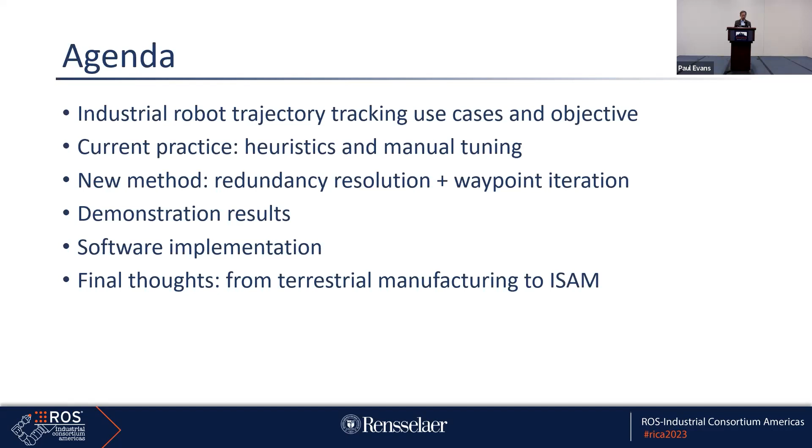Okay, so the quick agenda. GE brought this case, this use case to us - I'll be talking about their use case in a minute. When we initially looked at it, we said, oh, this has got to be a solved problem, right? We talked to other people and they said, oh, this has got to be a solved problem, you just use RoboDK, right? You use Robot Master, use Octopus, done, right? If you can do this in CNC with a bunch of G-code, you're done, right? So we went back to look at the problem a little closer, peel back and say wait a minute, there's still a lot of heuristics and a lot of manual tuning that's done right now. And there's no idea how optimal or near optimal it is, whether there's room for improvement or not. And also it takes a lot of engineering time to tweak it to work. So we developed a new method thanks to ARM support, and we have demonstration results. We do software implementation, and this is in partnership with GE, with SwRI. We use Tesseract for a number of different things, and Wason Technology. Then I'll talk about some path beyond this project.

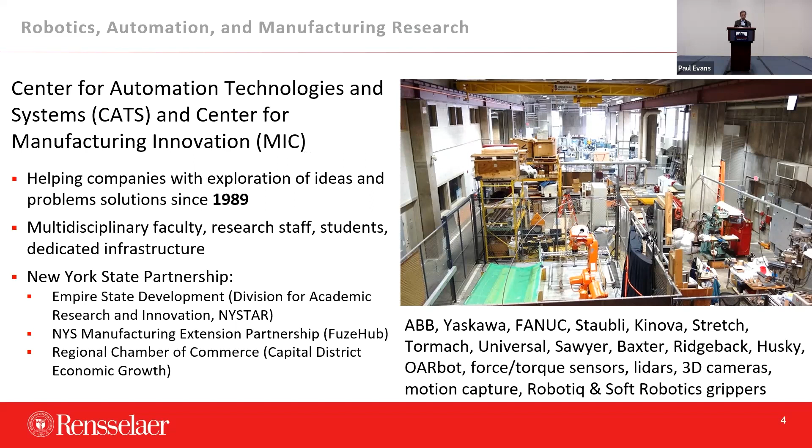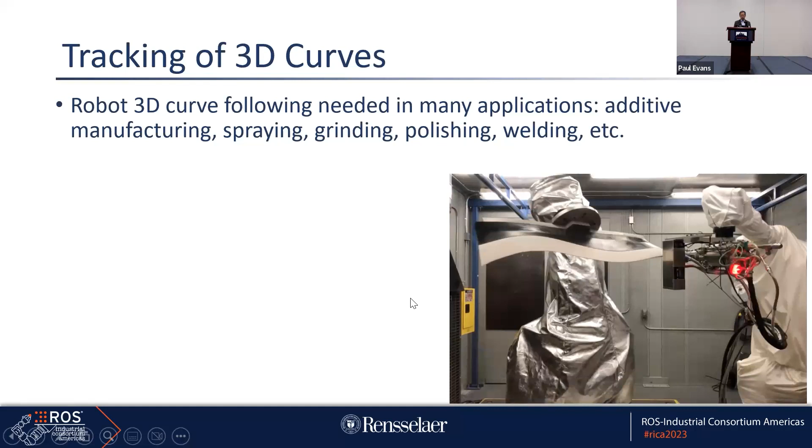So now the motivation for this project is cold spray. This is a turbine blade, and this is a cold spray coating, which is the high-speed impingement of particles on the blade on the leading edge to give it additional strength and corrosion resistance. This is from YouTube, and you see it's not just one robot, but two Fanuc robots working together, using something called coordinate motion, which you have to purchase extra from Fanuc. You say, oh God, this is really weird motion - how the heck do you teach the waypoints for the robots? So they did it, first for a single robot, and then when they pushed for two robots, things got a little dicey. Why is that? Because the task itself is 5 degrees of freedom.

You have 3 degrees of freedom for position and 2 degrees of freedom for orientation, because you can roll, right? So you have 1 degree of redundancy for a 6-DOF robot. Now for 12, so two robots, 12 DOFs, you have 7 degrees of redundancy. How do you resolve that 7 degrees of redundancy, right?

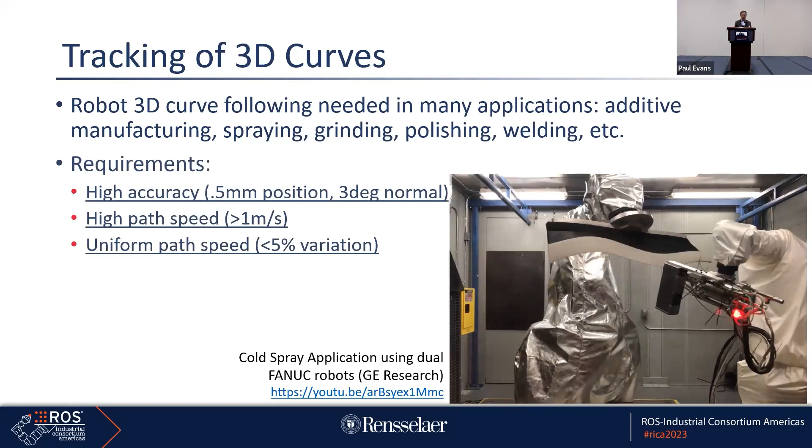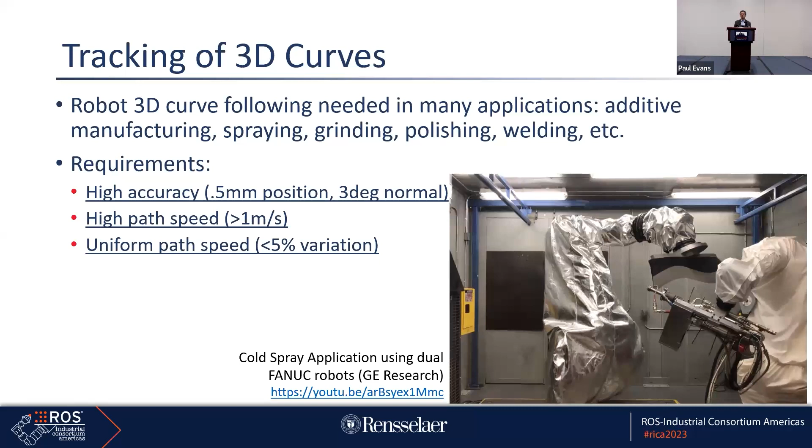It's done by hand. Furthermore, the requirement, this is maybe just GE, right? So it's not universal, lots of applications don't require this. They need high accuracy, because for the cold spray to really produce the impact you need, you have to be very close. So they say plus minus 0.5 millimeter, 3 degree normal. And they want very high speed. When they came to us, they said our reach goal is 5 meters per second.

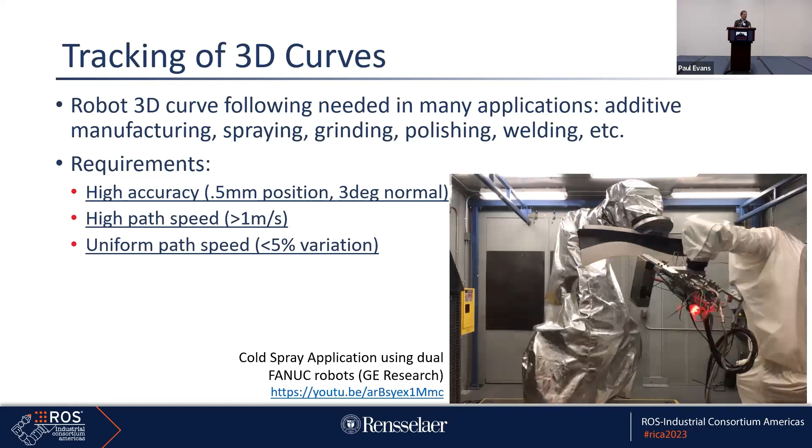I said, well, why don't we dial it back a little bit? So let's make it greater than 1. Okay, even that is not easy, right? And furthermore, they want this to be uniform speed, to have as uniform coating as possible. So what is done right now? How do they do it right now?

So first of all, let's consider a single arm with a fixed part. So in our lab, we have ABB robot 6640, and another robot just fixed, holding a part. So these are two test fixtures we have.

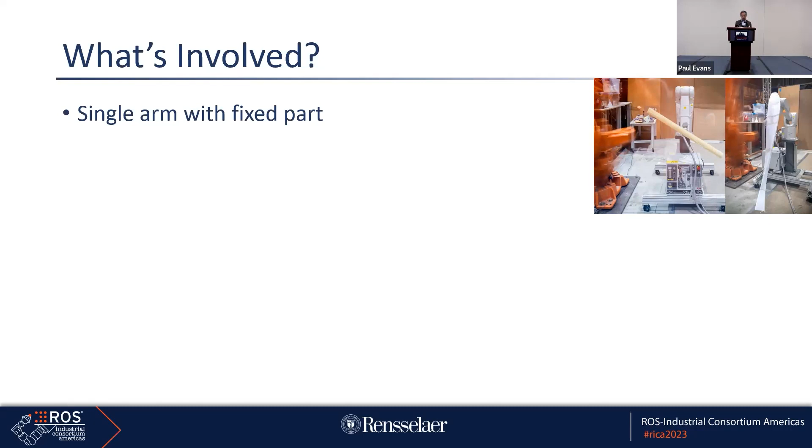So the first part is you need to determine where to put the part with respect to the robot, right? That's position and orientation, and you can put it on a stand, so that's a number of degrees of freedom. Then determine the tool orientation, because you have 5 degrees of freedom, so you need to determine this additional degree of freedom. And then you have to choose the arm pose.

This is a kind of subtle point, because earlier Dave Coleman talked about inverse kinematics. For a particular robot, you have 8 different poses, 8 different solutions for the same Cartesian pose, right? So which one do you choose? Most inverse kinematics solvers, for many robots, only give you one, because they use a Jacobian-type least squares approach instead of finding the closed form. And some robots don't even have a closed form solution.

If anybody looks at the Yumi, the ABB Yumi 7 degree of freedom arm, fix one of the joints, you have 16 solutions, but even though there's no closed form, you can still compute all solutions efficiently. I'll mention that a little bit. So all of this we lump into a bucket called redundancy resolution. That means you have multiple choices, right? So you have to resolve that redundancy.

Okay, the next step is to choose the waypoints. For the robot program, you use waypoints and then blend them together. So you also need to choose the motion segments, the motion primitive. Do you use linear motion, move L, Cartesian linear motion, or move C, Cartesian circular motion, or move J, joint motion, straight line joint motion? Of course, you have the corresponding interpolation of the position and orientation.

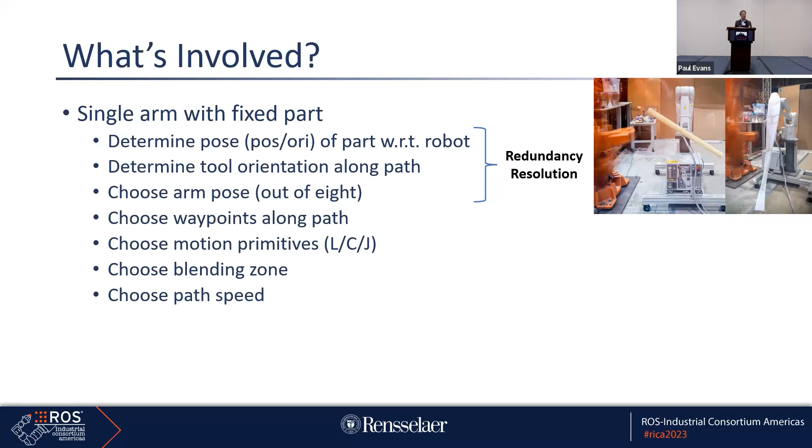And then to choose the path speed, you get to choose that too. All of this is motion programming, so basically you need to do both, okay? So you can see that usually what's done is you choose a uniform set of move L segments, linear segments, just like a CNC. The thinking is still very much CNC-driven, not realizing the constraints of articulating a robot, okay?

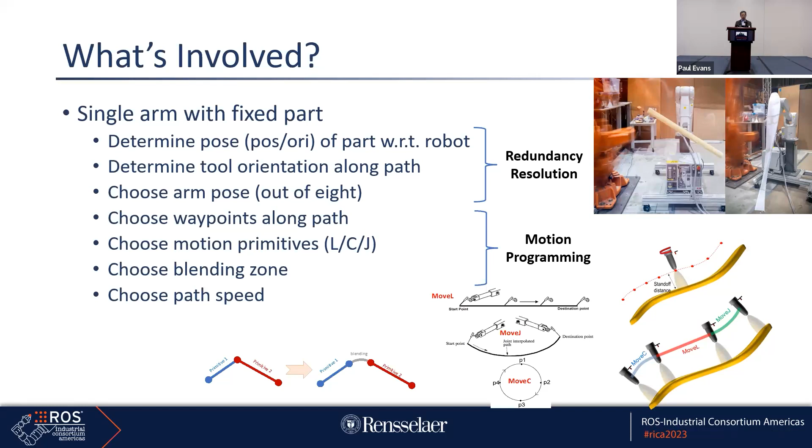And then you have a mixture of L, C, and J, and you have the blending zone. So how's it done today? You put the part in the middle. There's an intuition that arms should not be near singularity. So when it's outstretched, it's near singularity, it's no good. So somewhere in the middle, not systematic, but somewhere in the middle. And the tool orientation is chosen just to stay away from singularities. Then uniform space, straight line, that's how RoboDK does it, RobotMaster, Octapuz. You can tweak those, but the tweaking is pretty much based on singularity avoidance.

And then typically try to maximize the blending zone. The problem with the maximum blending zone is that you have tracking error. You have more smooth motion, but you have tracking error. And then you keep on lowering the speed until your spec is achieved. So usually that means you compromise on your performance if the speed, your cycle time, is your performance.

Now, for the dual arm case, it's even tougher. So how do they do it? Heuristically assign a percentage of motion. So you say, okay, I have a big arm, 60% goes to the big arm, 40% to the little arm. And then you use a single arm approach, right?

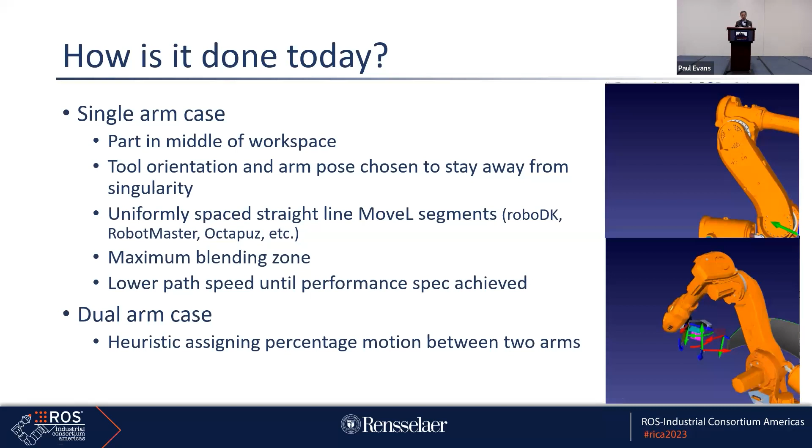All right, so you say, this can't be right? There's gotta be room for improvement. And yet when we talk to people, everybody says, oh, solved problem. Okay, so this is a Mac versus PC issue. So now you can see, okay, I use a Mac, so this, but you can see this is how the baseline is done today. So we use the following approach.

Basically, we decompose the problem. If you look at this as a gigantic optimization problem, forget it. It's not solvable. Obviously NP complete, just take forever. It's not practical. So we decompose the problem in the following way.

First of all, we do pose optimization and redundancy resolution to just tackle the redundancy resolution. Once you do the redundancy resolution, then instead of using uniform points, we use a greedy search. Basically, we want to use the least number of points to meet the kinematic fit.

Okay, so we use J, C, and L. And then minimize number of waypoints. Why? Because the waypoints have blending. Blending screws you up, right? Compromise performance. And then we adjust the blending zone for uniform speed.

Finally, the most important thing is what you specify, which we just talked about a little earlier, is that what you specify is not what you get, right? So you say, I want to follow this path, I specify all of these waypoints with this blending zone. You don't know what the hell you're going to be getting, right? You may get close and you may get a blip.

Every robot company does things differently, right? We use ABB, Motoman, and Fanuc, and even Universal, Sawyer - they all do things differently, and they don't tell you exactly how that's done. You can't even predict unless you run it, right?

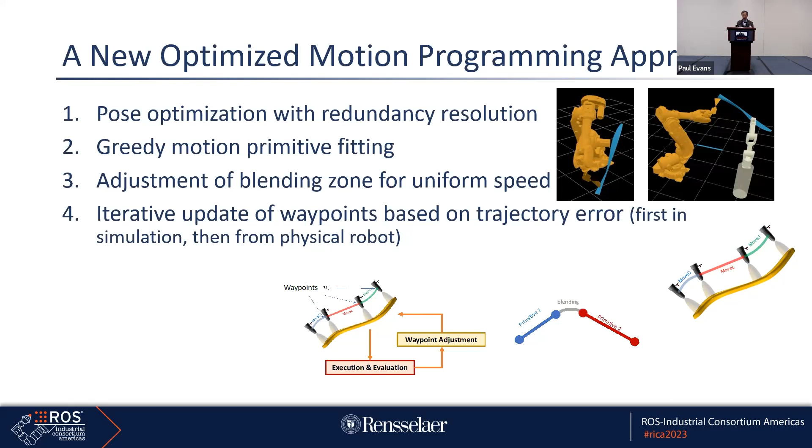So what we do is use an iterative algorithm. First of all, we iterate in simulation. Now, and then port to physical robot, of course, you will operate differently. And then we train some more using the physical data, okay, iterate some more. Okay, so I'll talk about each one very quickly.

So pose optimization, the redundancy resolution. So first of all, we use the standard. Earlier I was talking to somebody about Tony Maciejewski - it's a redundancy resolution, standard stuff. Okay, local redundancy resolution using quadratic programming.

But the challenge here is what is the acceleration constraint? This is where robots are different than CNC, because the robots have articulated joints, so the constraints are pose-dependent. The Cartesian constraint is dependent, how that relates to joint constraint, and the joint acceleration constraint depends on the Jacobian.

But we don't know what the acceleration constraint is. You look at the robot spec, you can of course see the joint velocity constraint, but nobody will tell you the joint acceleration constraint, because that's fundamentally the torque constraint, and then it depends on the inertia, depends on the load. You don't know what it is, right? You can't calculate it. So what you do is you have to shake the robot around, okay?

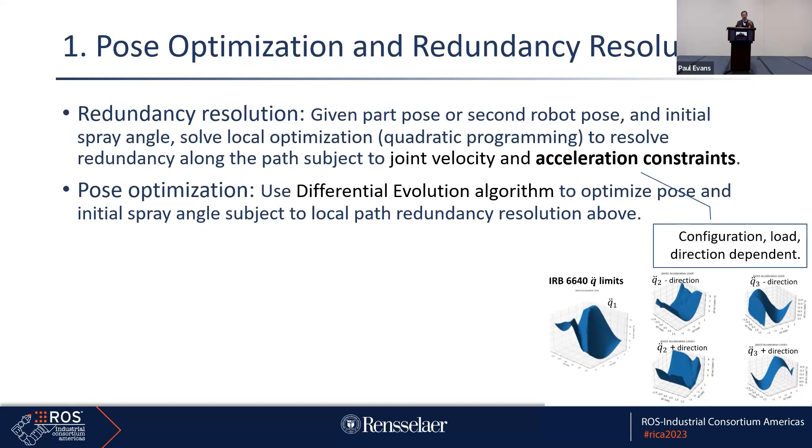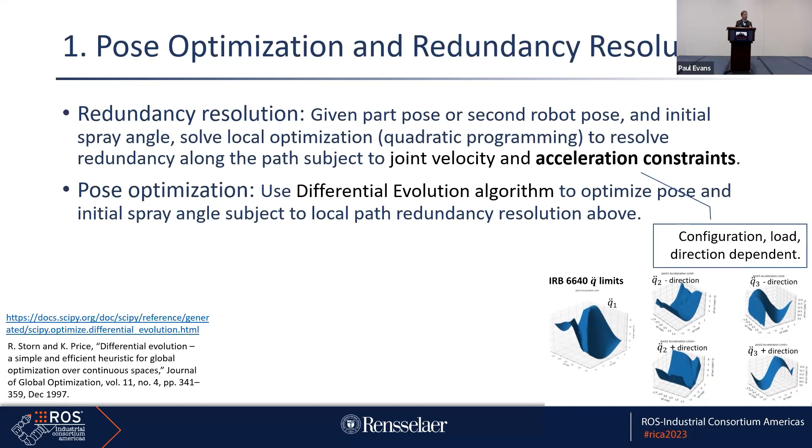So this is experimentally obtained, and then for a given pose, we optimize the pose based on that redundancy resolution algorithm. And we use differential evolution - I think somebody mentioned differential evolution earlier. And we use a standard open source differential evolution algorithm, and it seems to work reasonably well.

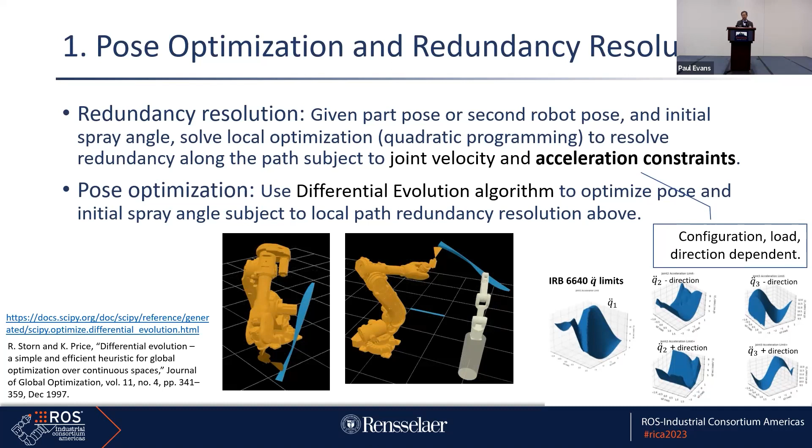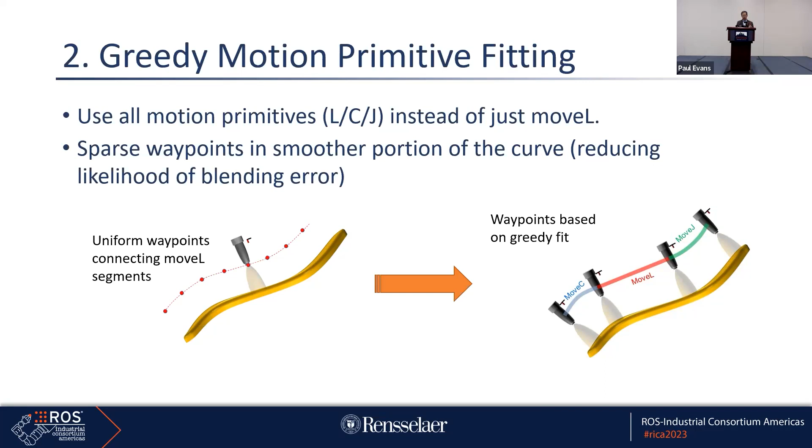And then we have the optimized pose, which is different than the intuitive industry practice pose. Okay. The next is greedy fitting, which is straightforward, and then we get a sparse set of waypoints. And the third is blending zone: we usually have the largest blending zone, and then we keep on decreasing blending zone until you get some speed uniformity, and then we actually specify different speed in different motion segments.

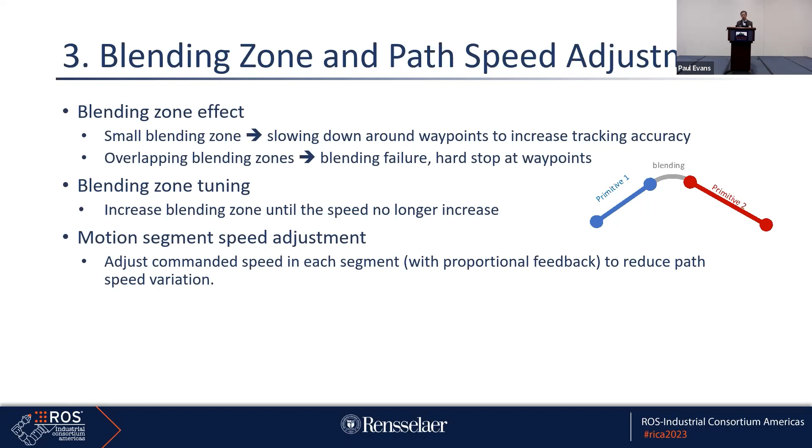And finally, we do the iterative waypoint adjustment. This waypoint adjustment is, basically you have all these waypoints, and you adjust these waypoints using a very simple gradient algorithm. We use numerical gradient using simulation. But since we don't know the vendor-specific blending algorithm, we just use a standard cubic fit, okay, the cubic spline fit. And it turns out that fit, of course, it's not exact, but it gives you a good enough gradient algorithm.

You need a perfect model for the inverse problem, for inverse kinematics and stuff like that. But you don't need a perfect model for the gradient, right? Because that just gives you a descent direction. Even if you're a little wrong, you're still in the general descent direction.

And then we use that to generate the gradient, but we only do the gradient at the peaks of the error, and we'll only do the gradient near the waypoints near the peak.

So an alternative method is to use reinforcement learning. Eugene mentioned reinforcement learning, and we applied that, and it gives a very intuitive kind of strategy.

Which is to adjust the waypoint in the error direction, versus where you want to be, the actual trajectory, the actual path versus what you actually have. So we basically combine these two, first of all in simulation, and then for the physical robot.

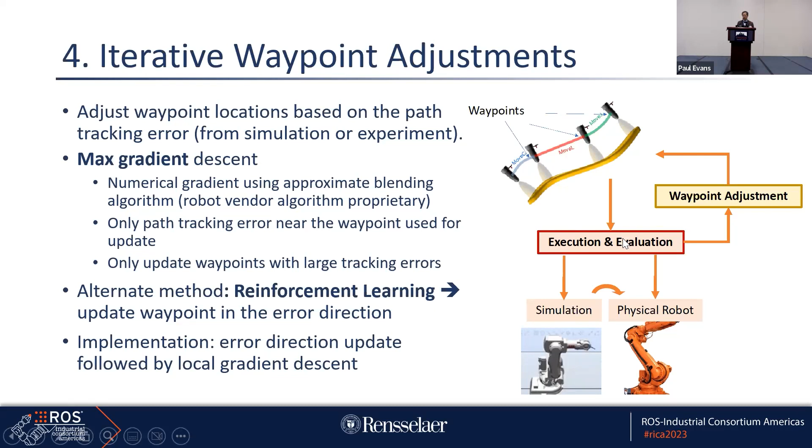And then adjust the waypoint until the performance is met. So how do you evaluate performance? Adam, we were talking about that earlier. We basically consult our GE partner and say, what will convince you that this algorithm is useful?

First of all, they say we can have a toy case which is challenging, where you have a lot of motion on a curved surface, and the normal goes back and forth.

That's curve one. Curve two is a representative fan blade, kind of this curvilinear thing that they gave us.

And we try on the physical test bed, both simulation and physical tests on ABB robots and Fanuc robots. So Fanuc is over at their test site, ABB is our site. Again, we use RobotStudio and RoboGuide.

The motion, so these are just waypoints. So we will do the algorithm in Python, and then we automatically ship it off, and that's the interface we built.

John Watson built it to automatically generate RAPID code or KAREL code that you will execute automatically. So everything will be automated, just like that.

The performance, as I said before, that's what we want to do. So the performance we pose as this: you want to maximize the path speed subject to minimizing cycle time.

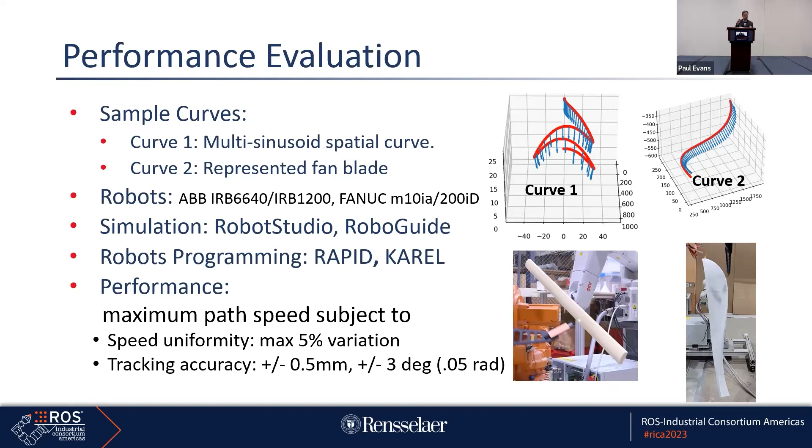Subject to the speed uniformity constraint, accuracy constraint, position, and orientation. Those are constraints. The one number you want to maximize is speed.

Okay, so this is a video. We use Tesseract for visualization, for collision checking, etc. You do need to worry about collision as well, because you don't want to get too close, so even for the initial placement.

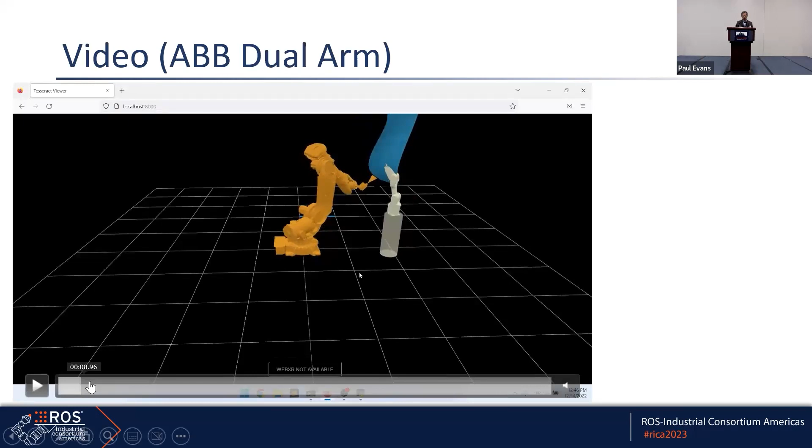So our workflow involves initial visualization, starting from the CSV file of the path, uniformly spaced, dense set of points. And this is our experiment.

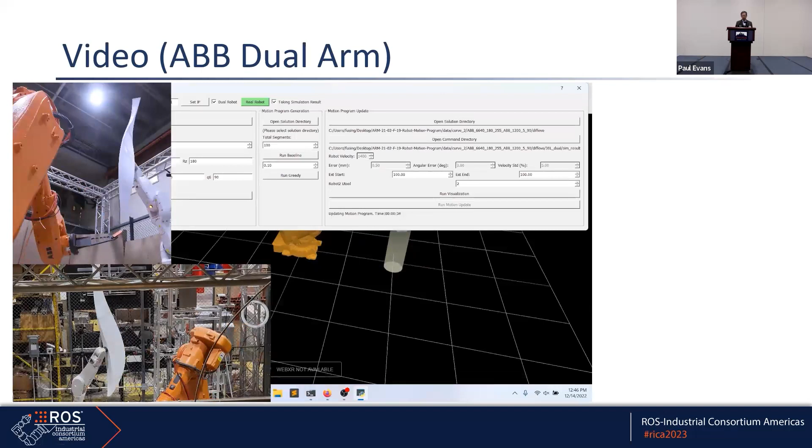And then we will perform the actual motion, which is very quick. So most of the time it's actually going to the starting point. And this is, and that's up, right?

So then you can see the performance. So this is already the 9th iteration. You can see that's already pretty close to, under, below the 0.5. I should stop here.

Okay, so you can see this 0.5 is here, and then this is the speed uniformity, and this is the orientation. And then you do one more iteration, and then we'll stop and save the result.

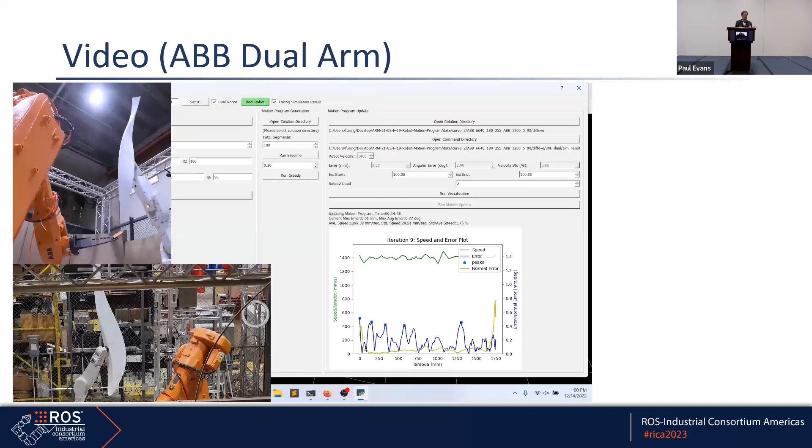And so all this result, earlier we talked about benchmarking, and all of this is saved in something like ROS-I, right? But how much do you save? This is a lot of data, right? But you need all of this data to show.

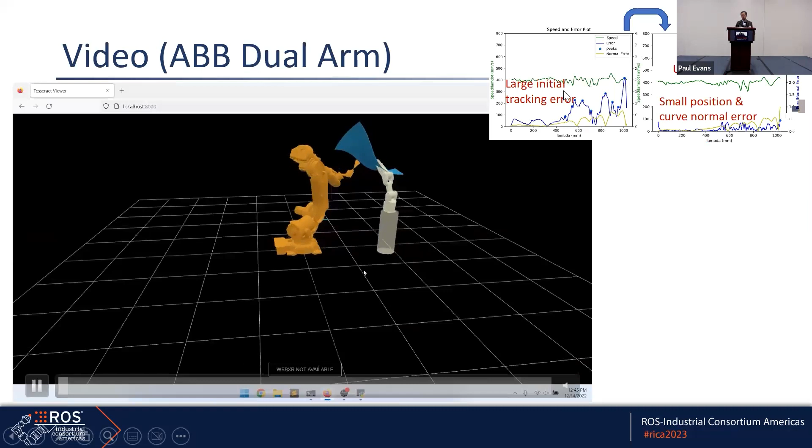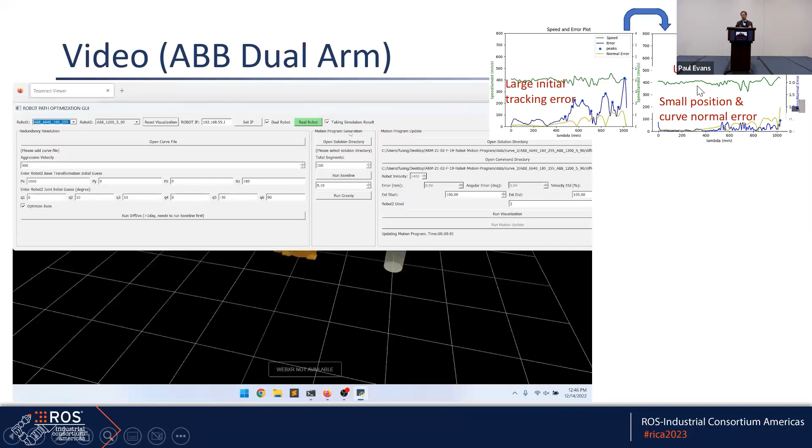So this is just to show that from the first iteration to the last iteration, you can see the algorithm push all the peaks down. You can see the peaks pushed down while still maintaining speed uniformity.

Okay, so this is after a lot of testing with the ABB and FANUC. So for ABB, since we had the test bed, we did a lot of testing. So the baseline is 0.1 meter per second.

Okay, that's the best that can be done, and it will still satisfy the constraint. So suppose you just use a single arm, but you just optimize the waypoints.

To modify the waypoint, you can already double. Now, if you optimize the location and the pose, you can increase that even more. For dual arm, you can actually increase by 4 times. So you'd say, okay, 2 arms, that's a lot of investment, but even for single arm, optimizing the location and pose of the arm makes a big difference.

For curve 2, similar kind of result. For FANUC, I don't have the dual arm yet, so it's double for curve 2. So for FANUC, the geometry is a little different, but you can apply essentially the same algorithm.

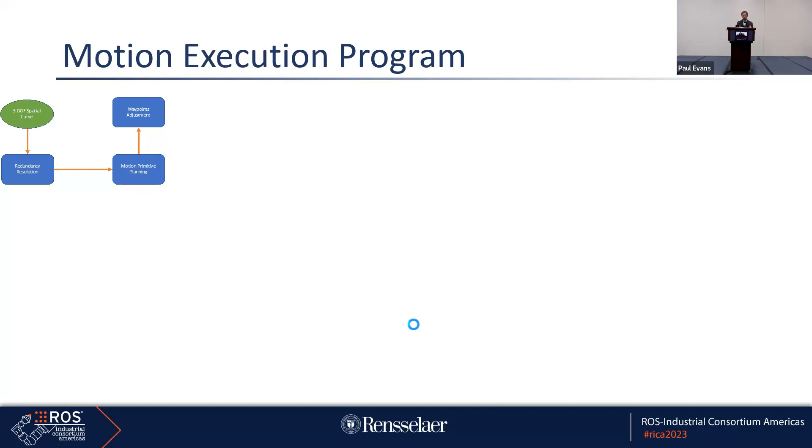So the overall workflow is just 4 steps, right? I can't even read this, it's too small, but basically you start off with the curve in a CSV file. You do the redundancy resolution, you do the motion primitive planning, and you do the waypoint adjustment. That's it.

Okay, so all the Python modules are available. There are different modules, and we use Tesseract for browser visualization and collision checking, not for path generation. We also developed a Python wrapper, so to install Tesseract and use it in Python, it's a simple 1-step process. It's a Python wheel, a very simple installation.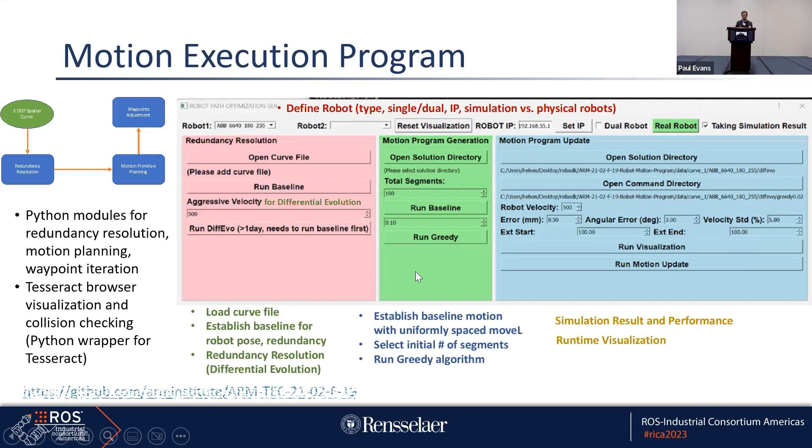Okay, so in summary, we generate all of this stuff. I want to say the one core thing the industry can really improve - robot vendors, looking at you, Roger - is coordinated dual arm. The dual arm coordination that's sold as a separate thing by different vendors is just terrible. Actually, the streaming like MotoPlus, EGM, Stream Motion, etc. don't work for dual arm, so you have to artificially sync them up.

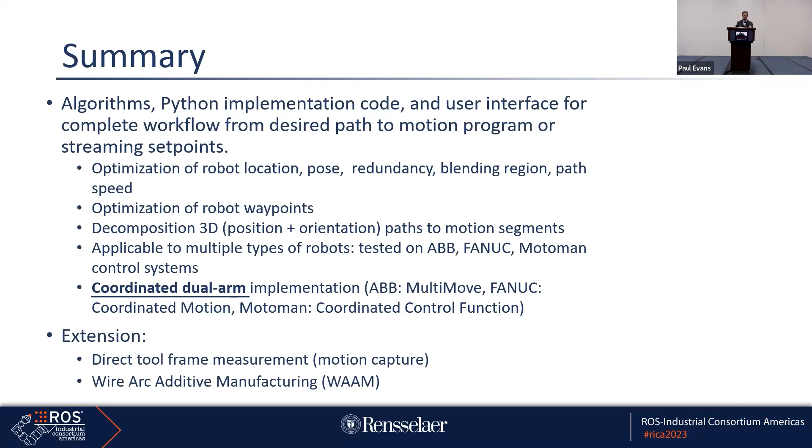So we've now done some extension directly to motion capture, directly to measurement. Also, we're extending to wire arc - I talked to a number of you about our WAAM cell.

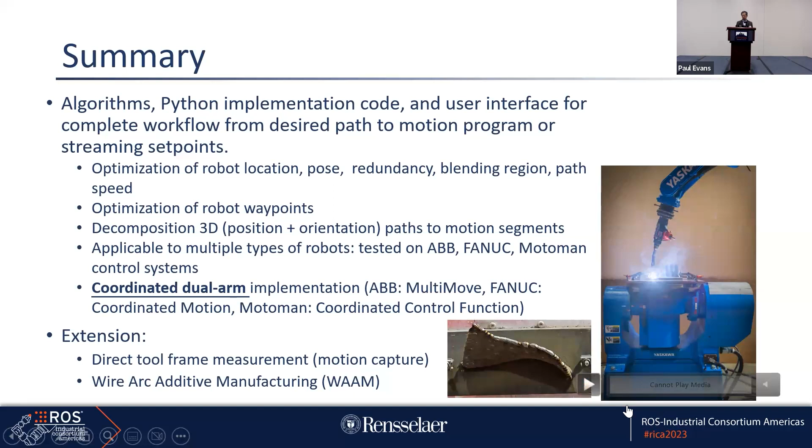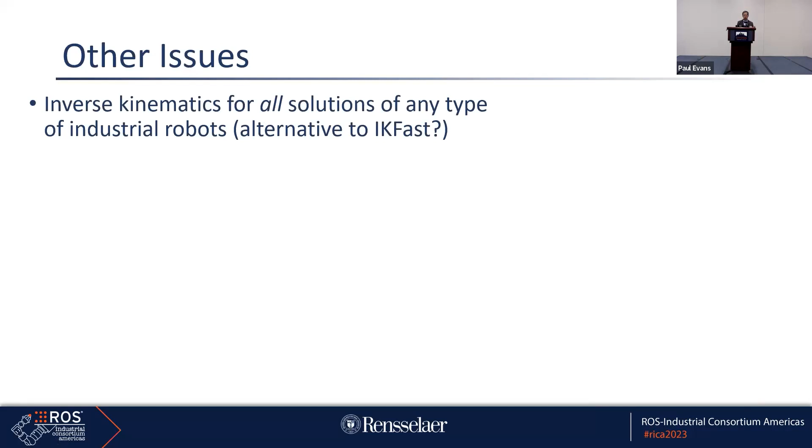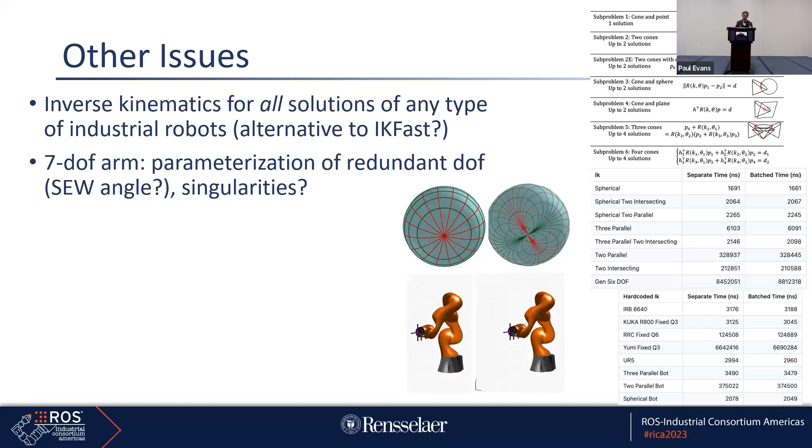Of course, this is a KUKA arm - is it KUKA or Sawyer? Iwa, that's right, yeah, this is a KUKA. So for 7 DoF, choosing the additional degree of freedom makes a big difference. And now David Coleman talked about in-space servicing essentially - yes, 7 DoF is a big deal, but flexibility is very challenging, and that's up and coming.

So thanks to ARM and thanks to the partners, all the stuff is available on the ARM GitHub. I think there's a link early on. And of course, I didn't do any work - everything is done by the partners.

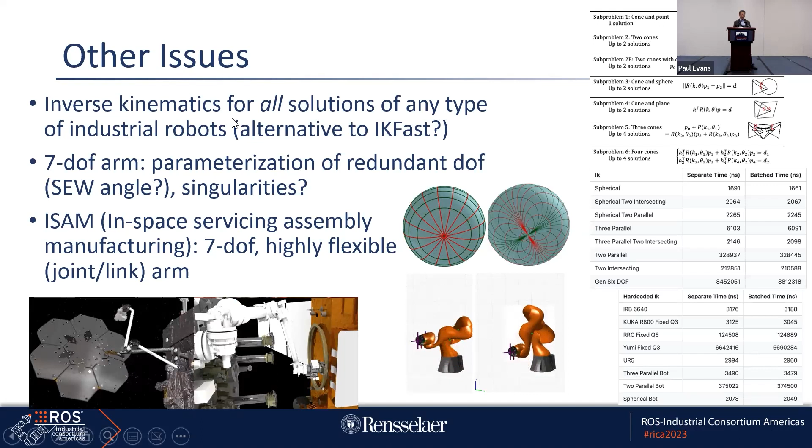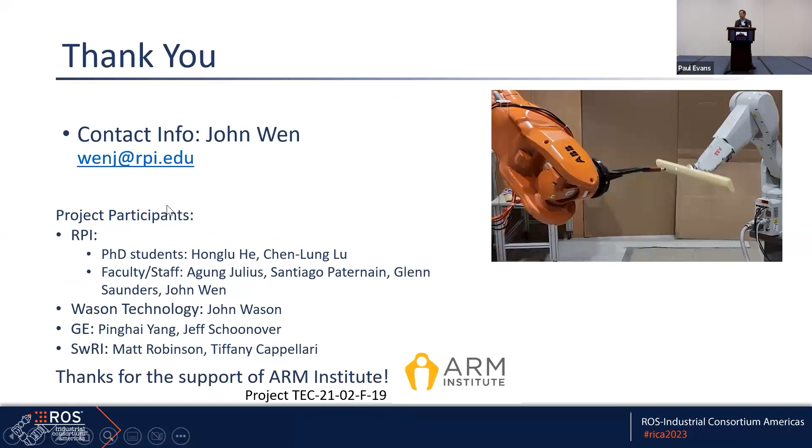And there are two papers that are on the arXiv. One's on inverse kinematics, the other is on 7-DOF arm parameterization. Rather than using SEW, you can use a modified SEW. You go back to the improvements in speed that we were discussing.

So earlier we were talking about how do we transition university-based research to industry research, right? So this is about TRL 6, because we do it in the lab, et cetera. Basically, we work with Boeing and others - they basically take this in-house and then they say, okay, get the hell out, right, because we will absorb it. We will ask you questions when we have any, but that's how they will go about doing it.